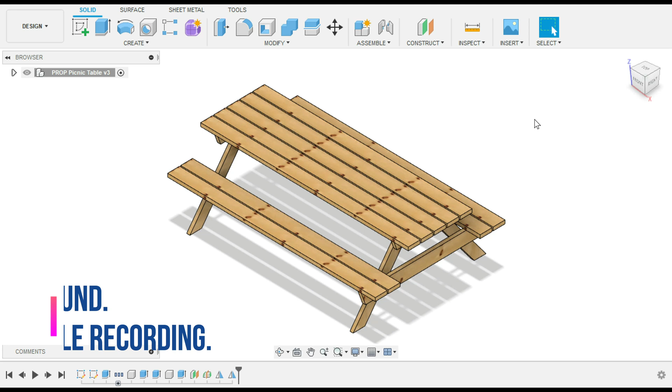Okay, so we're going to build a picnic table in Fusion 360. Let's get going.

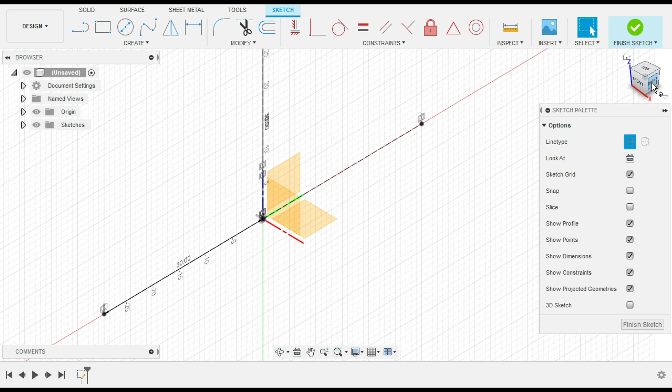The first thing I would do here is set up the bottom portion of where the ground is going to be. I would use a construction line for this, which basically gives me a point of reference for the actual ground where the picnic table would sit.

I can also use both the vertical and horizontal for mirroring purposes, which always comes in handy.

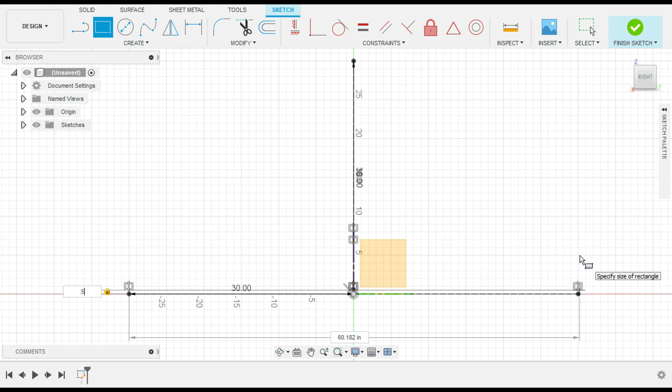Now, I did set some parameters on this particular build, but I don't remember if they came into play on this one, and this was done before the recording of the voice commentary. I did not narrate it as I went along, so just keep that in mind.

I apologize if I rattle on or try to remember what I did at a certain point. But anyway, I'm essentially designing the bottom portion of the picnic table here, and you'll see more as I go along as to what I'm doing.

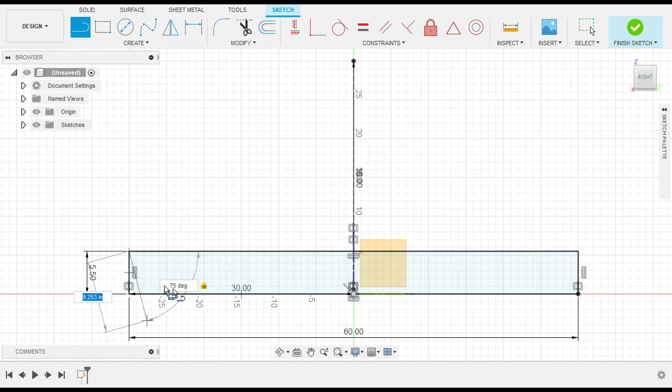A cool thing I just did there I want to talk about is you can set the degrees and they lock in place, as you can see. I'm trying to cut a little miter here on the tips of this wood, and it's letting me adjust the length while not adjusting the angle.

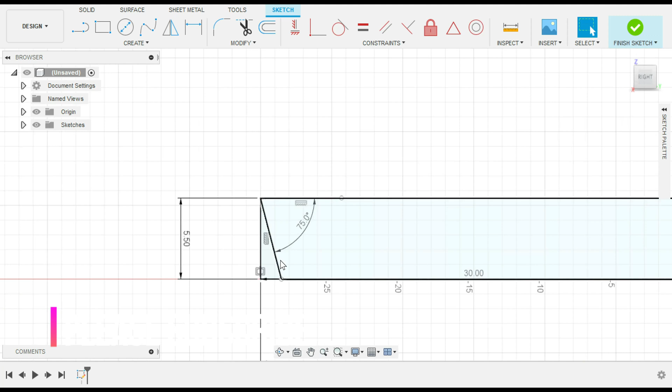Because I set the angle first, the key is to set the angle first, and then you can adjust the length that you need, and it'll maintain that locked-in constraint of the angle. Very nice feature in Fusion 360.

And I just mirrored it as you saw there, which I do all the time. It's a great time-saving tool to be able to mirror everything along.

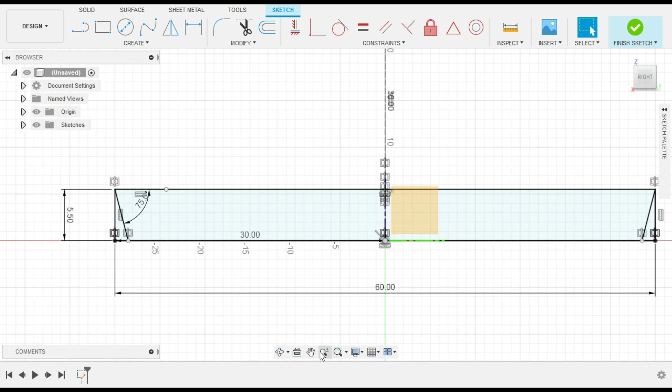Now, on this one, and a lot of the ones I do in Fusion 360 for woodworking more so than leather, I tend to do an entire sketch first and then start extruding. There's the actual parameters I set.

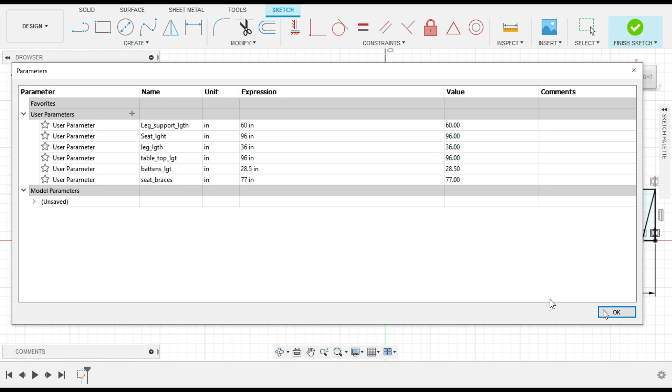But I like to extrude at the very end. I don't know, it's a preference. Some people extrude stuff as they go along. You can do it either way, but I typically do the entire sketch first, as you will see here.

The parameters I have in place are in case someone wants a picnic table on order and they want one for a family of 6 or 10 or 15 instead of just a standard picnic table. So you'll see what I mean.

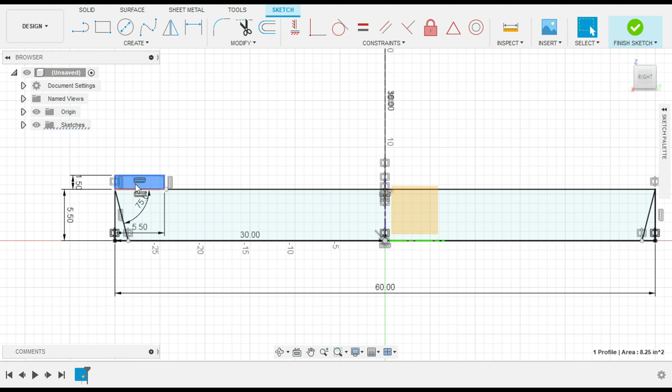The standard width is 60, as you can see at the bottom, from seat to seat, and you'll start seeing now the seats form, as a matter of fact. And I'm just copy pasting and dragging it over.

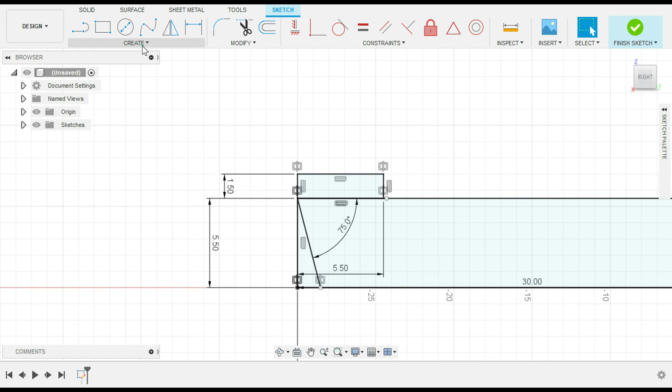It's just that simple to drag over the 2x6s, which are what these are going to be eventually, as far as for copying.

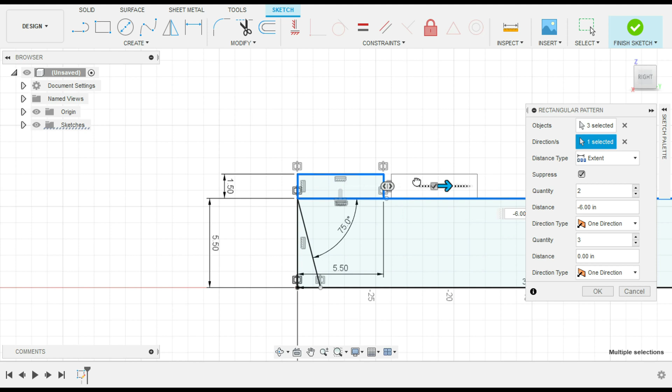You can do rectangular pattern, you can copy paste. There's different ways in Fusion 360 to get you from A to B. In this case, I'm just using rectangular pattern again, which I've used in the past, which is amazing, as you can see right there. Just a great feature to have, to be honest.

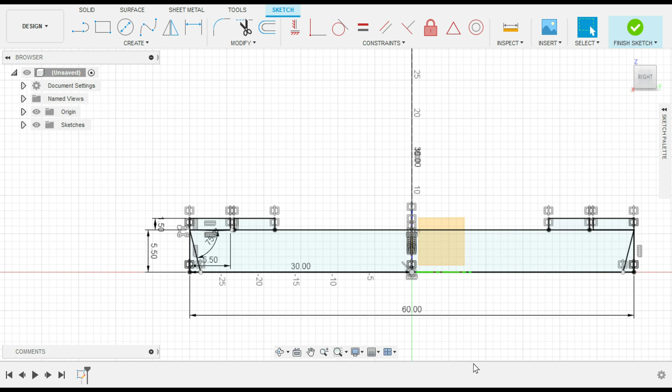So as you can see, just using more of the mirroring feature in Fusion 360 to help speed this along. Can't say enough good things about Fusion 360.

Something I'm noticing here also is that line I set for a construction line at the very beginning was actually for underneath the base support for the seats, not the actual ground level, just for clarification. You'll see that in just a minute, if you can't already tell what this part of the table is.

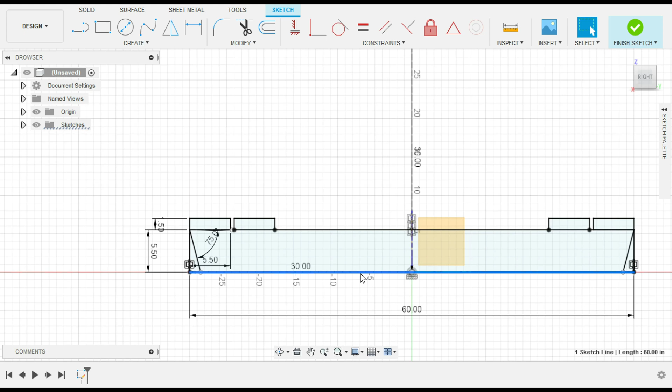What I'm doing here is setting the top of seat to top of the table measurement. And I'm using, again, a construction line just so that it's not a permanent line there that I get mixed up with anything else during the extrusion phase.

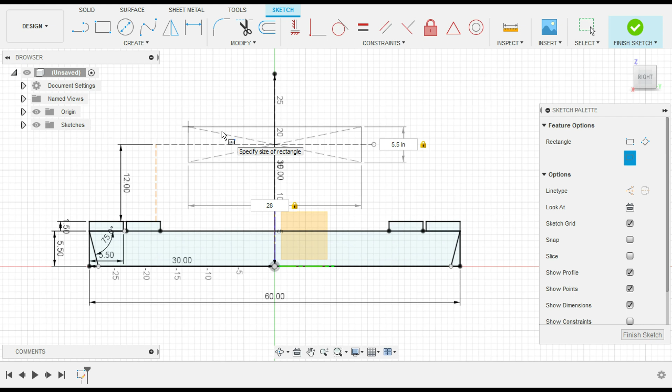Now, I'd mentioned that the construction line is at 12 inches from the seat to the top of the table, but as you can see, it's not there yet, but it will eventually be lowered down to the proper height.

It's just that this is used as a reference to let me know where I need to get it to eventually. Many ways of doing it, again, but this is just how I choose to do it most of the time.

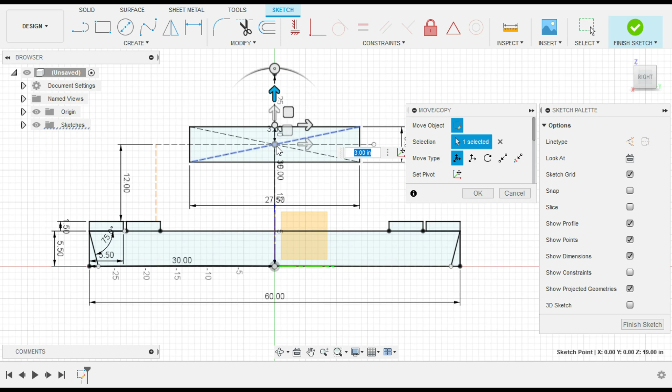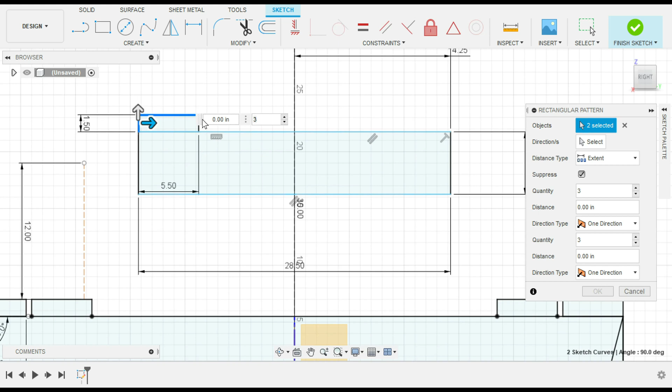So again, for adding the 2x6s to the top, you just do copy paste, or you can do, like I just did there, rectangular pattern, and just put as many as you think you're going to need.

In this case, I know how many I need, I've done this before. And you can drag them over, or you can just set exactly the spacing you want.

I didn't even, as you can see, it's still an extent. I didn't even feel the need to use the spacing feature. But anyway, looks pretty good. Right on, can't beat that.

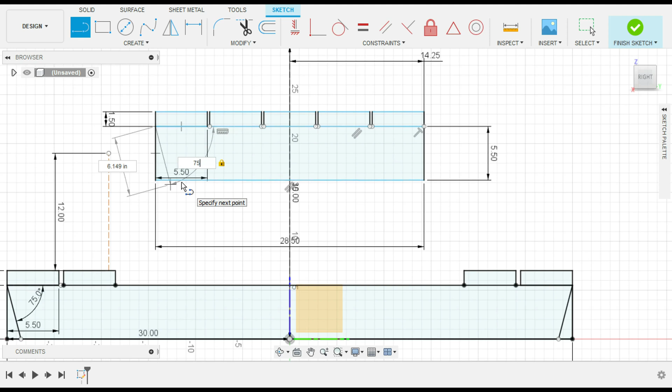And again, you'll see here I tabbed over to the radius to set that first. And once you set that, you can drag to the length that you need for your eventual miters, which you'll see me cut out with the little scissors up there once I get to that part.

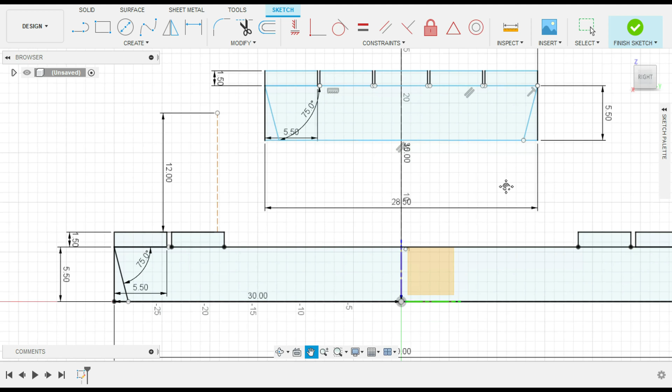Okay, the fun part now is going around and cutting everything out. As you can see, you just grab the scissors and start cutting all of these lines that you don't need, which will help you achieve the miter, as you see there. And I do it for the top as well.

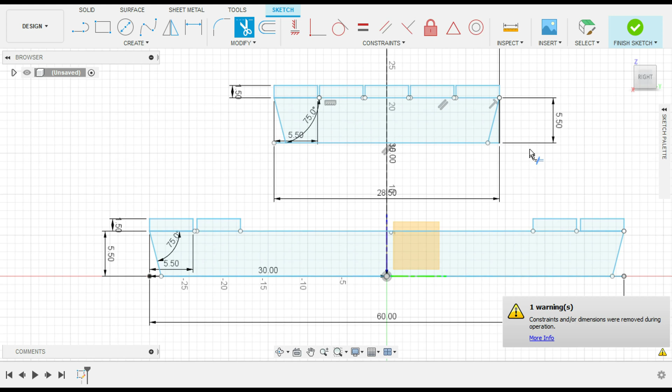And if you didn't see it earlier, I do have my 12 inches now from top of seat to top of tabletop, which is what you want.

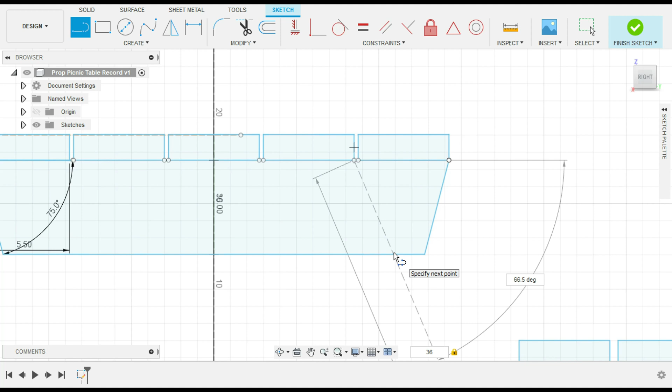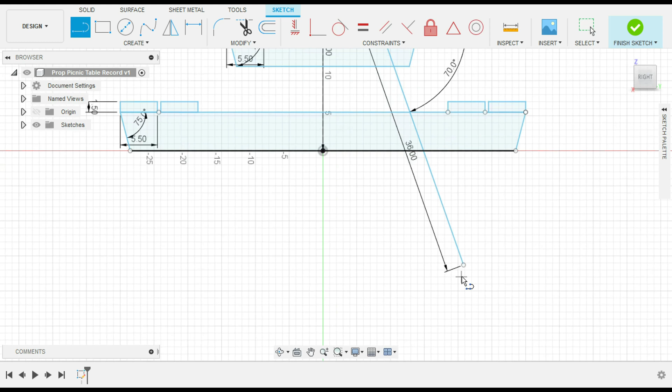Okay, so now we're going to get into the legs. I know the radius that I want, as you can see, I set that first, which is awesome. And I know my length is approximately 36 inches on this board.

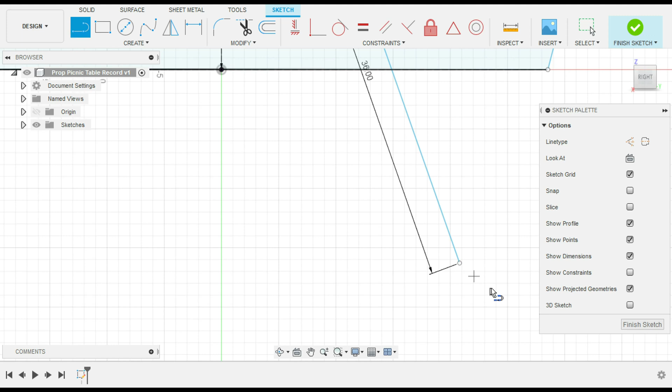I'm just checking here the miters that I want to do to get this flat, and setting those now. I'm also seeing that I used construction lines. Yeah, I caught myself, that wasn't right. I do that a lot. Fusion 360 picks up where you left off, so if you're in construction lines, you're going to be in construction lines until you click that off. You got to remember to go back and do that, which is easy to catch because you'll see right away that you're still drawing construction lines.

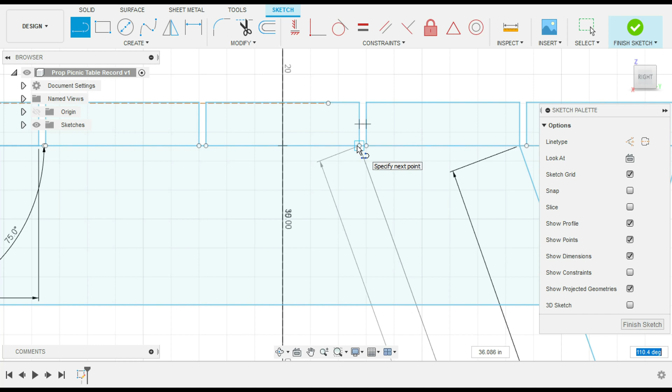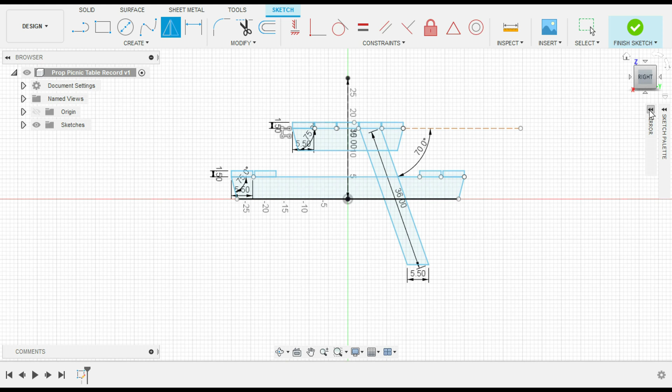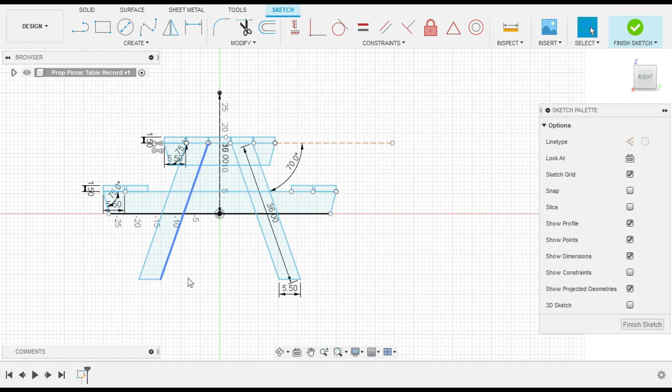Okay, so got the first leg done there on the right, and what do you know, we're going to mirror this again, which is the fastest way to do it. So I'm going through here and clicking on the individual lines that I want to mirror, and then I'll click that center line, construction line there, right there as the mirror, and there you have it. Just that easy. Really starting to look like a picnic table.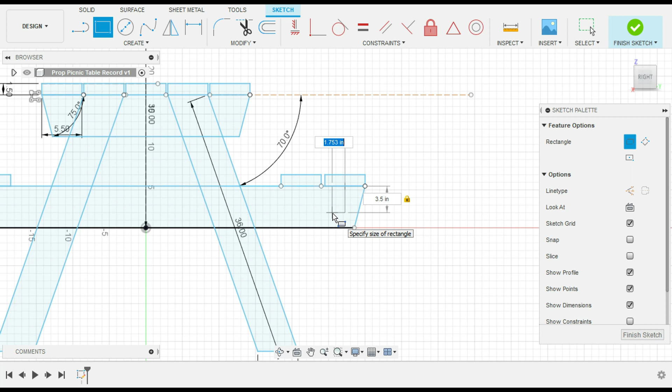So like I said before, I like to use this as a sketch first before I extrude. So now you're seeing that I'm going a step further and putting the seat supports in underneath where they're going to go as well. Again, you can do this later, but I just do it up front a lot of times as far as on the sketch, and then extrude everything at once.

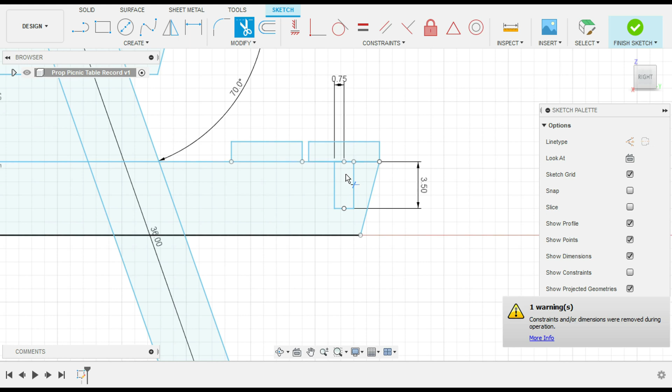Okay, another reason I wait to do the extrusion is because it's another one of the fun parts, like using the scissors. So now we are just about to do that. We're going to start the extrusion process. And all you do is hit E for extrusion on a Windows PC.

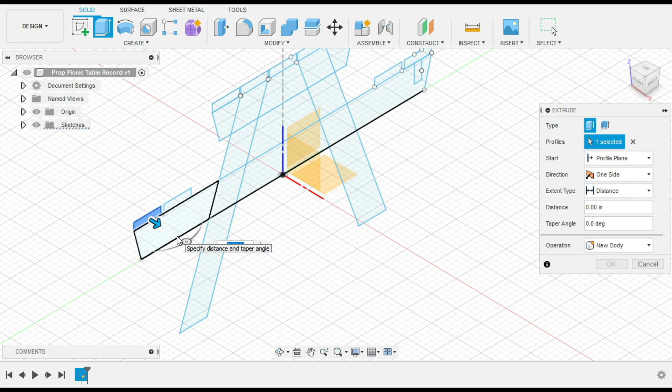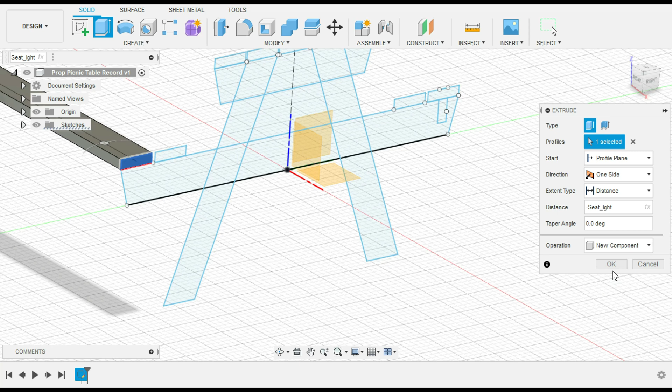And in this case, let me see, yeah, the origin. So I am on the side of the plane where I need to go negative to have a physical object. If I were to leave it where it is now and do a positive number, it's going to go the wrong way of the table that I want it to go anyway. So in that case, you do a negative number to the length you want, and there you have it. It just shoots it out the opposite way of the plane, which you see there on the Z-axis.

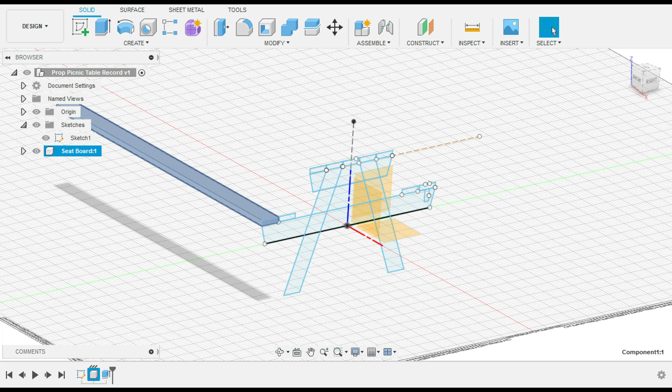And again, Fusion 360 takes off when you extrude. It removes the sketch from view, which is just, I still to this day don't know why it does that. I don't know what you achieve from that, but that's how it is.

Okay, and I apologize if you hear any noises in the background. That's my German Shepherd, but hopefully you don't hear that if anyone's listening to this video.

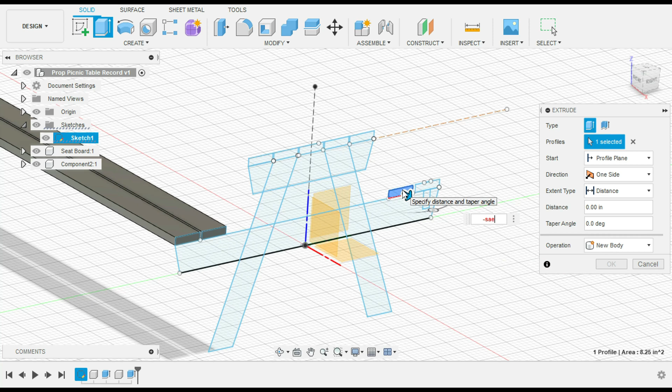So we're going to continue on here and do the other two seats and the support. We'll do the legs and everything else. And you're about to see a mistake that I made up here in a minute, which I left in for educational purposes.

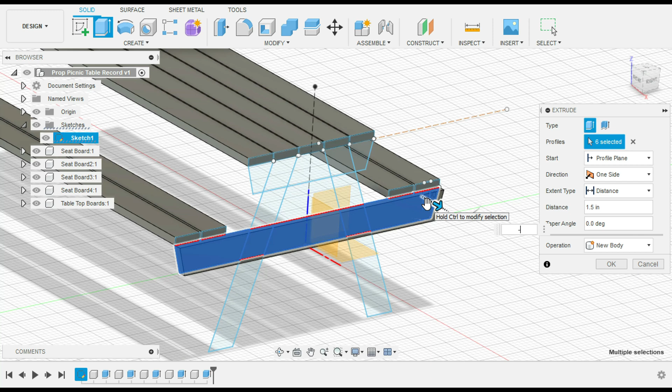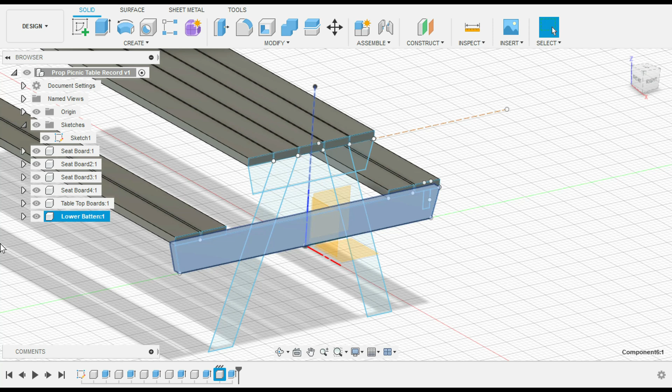Don't feel like it's a big deal, doesn't look like it's a big deal, unless you've already seen what I've done here. What I've done is I didn't allow for how much I need to be off of that plane. Keep in mind, the plane that I'm on, that I'm extruding away from in the negative, is the starting point of the table. So in this case, I need to do some math to get the proper distance away from the edge. Otherwise, you're going to have the most ridiculous looking picnic table ever, because the supports and the legs will be on the outside of the table, which is not what you want and quite ridiculous.

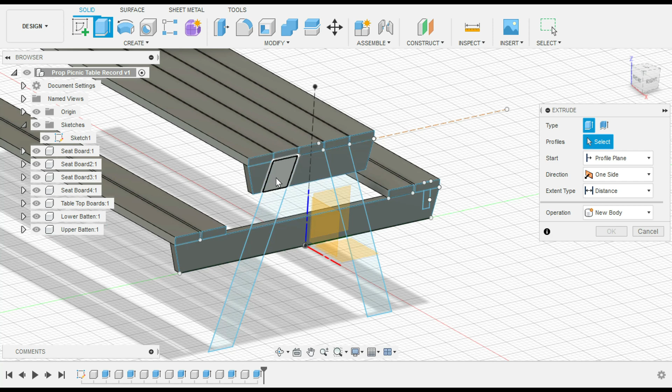So I made a mistake here, caught it, left it in, and then I'll get to the next part where I fix it and you can see how I did it.

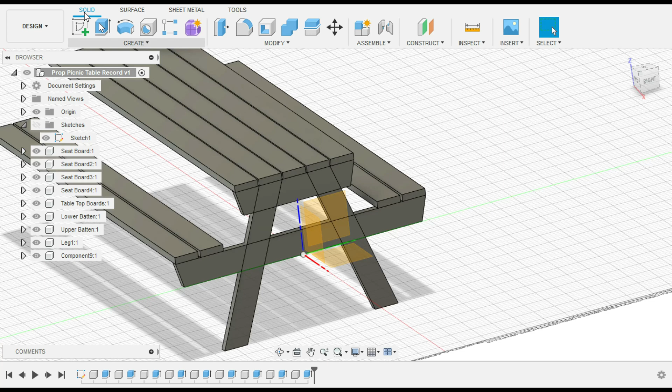Okay, so looks like I went and got some more coffee and decided to redo this the right way. And as you can tell, I need to do an offset. You'll see here it's going to be an offset.

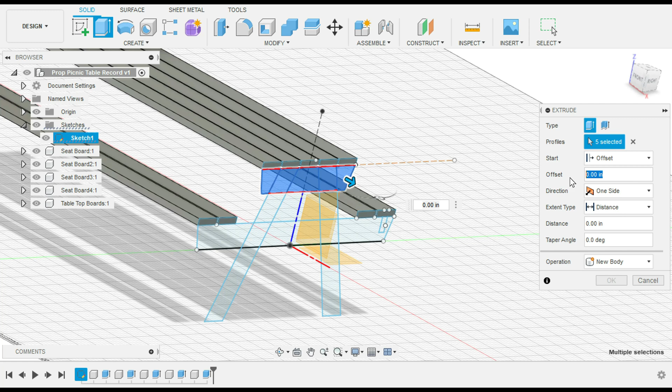So all you do is you drop down and it gives you another item to put in for offset. So now I know I want the face of this to be 8 inches away from the plane, or the edge in this case, and then I can do the math. So I did 8 inches on an offset, and then I did the 1.5 inches thickness of the board, and look what it did. It moved it perfectly into where I need.

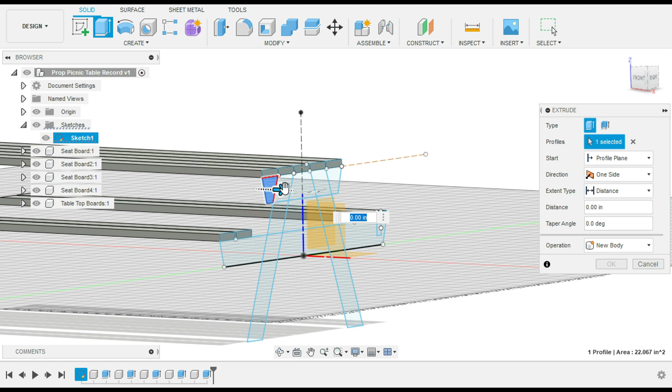So you're going to have to do math here, because some of these, like the legs, need to be on one side of the support, vice versa. So you get into a little bit of math here, and maybe even some deleting and revising to get it where you want. And it looks like I may have actually wanted to do it again here as well to bring it in even further.

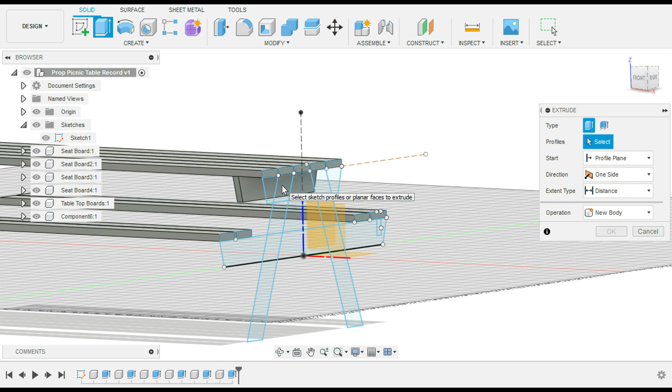So again, here on the legs, you're going to have to do a little bit extra math as an example, because you're going to want to not only bring this in 8 inches, you're going to want to be on the other side of the base. So you're going to have to extend the thickness of the actual 2x6 for the leg, which is 1.5 inches.

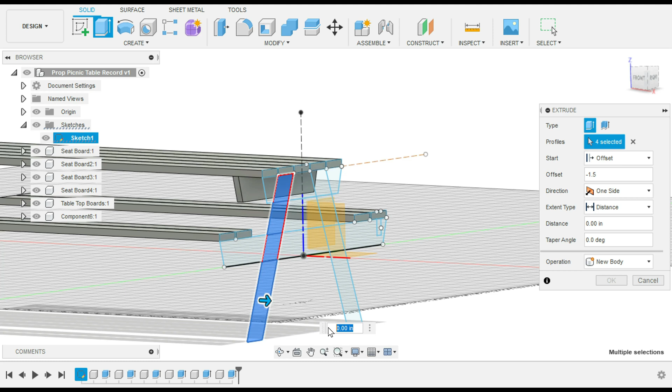So the offset here, I don't think I'm doing that right, it looks like, but yeah, so I didn't do that right, you can see. And again, I recorded the Fusion 360 before the voiceover. Gotta remember how I did it. There we go. So that looks a lot better.

It's on the other side of the base support, which is going to have to take into consideration the 8 and the 1.5 inch thickness of the support. So you have the 9.5 inches to the face of that leg and where it needs to start before you can extrude the 1.5 inch thickness of the leg. And you would do that on both sides, which is you can mirror that, or you can simply just go through and do each one individually.

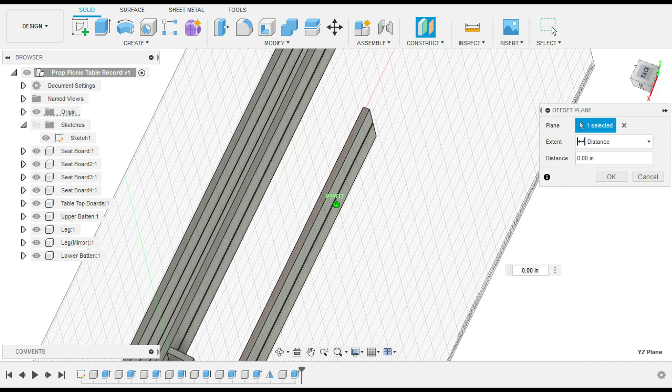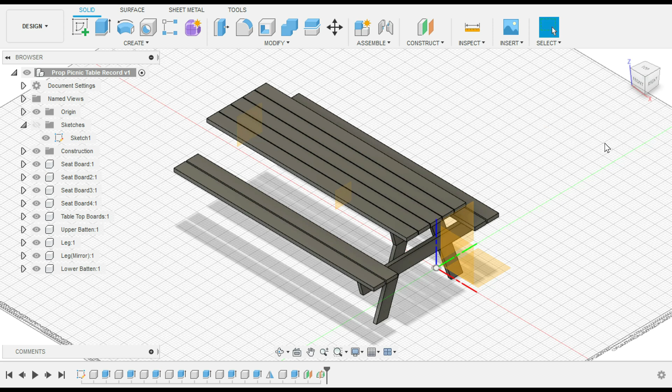Okay, it really looks like a picnic table now, but it would fall over if I left it like this. So you can see that I added the construction planes, which are great. One offset and a midplane will allow me to mirror all of these objects at one time with one click, and there you have it, just like magic.

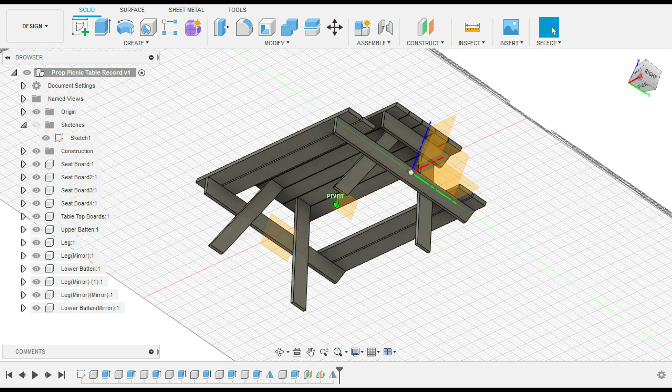And again, these are all separate components on the left, as you can see, that I can print out on a later date for a PDF printout, for blueprints, for material list for someone. It'll literally spit out exactly what you need to build this table. You could go a step further too. You could add in the bolts, which I've done for customers before, or whatever, however far you want to go.

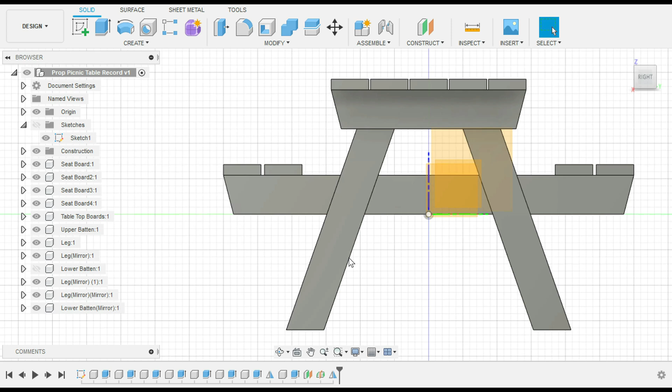And on this particular build, the Fusion 360 build, I don't even think I went all the way with all the supports. I know I do the ones under the seats, but I don't think that I do the braces underneath from base to base, which you're going to need on a picnic table.

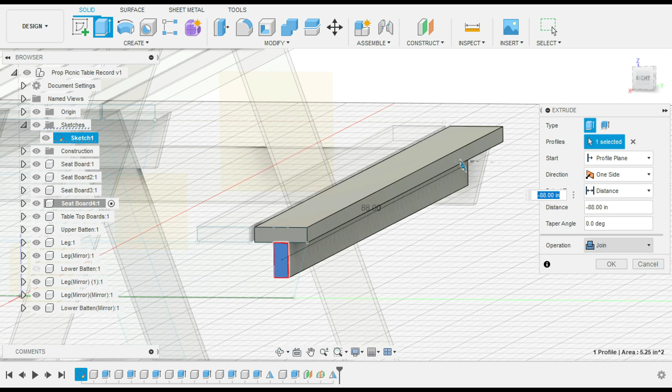But even this was a little tricky too. You've really got to do the math, because you got to think you're on the surface of the base 8 inches away, and you need to go the span to the next one. So you really have to be on top of your game, or do a lot of back and forth on this. But once you get one, you can easily copy them over and mirror, which is great.

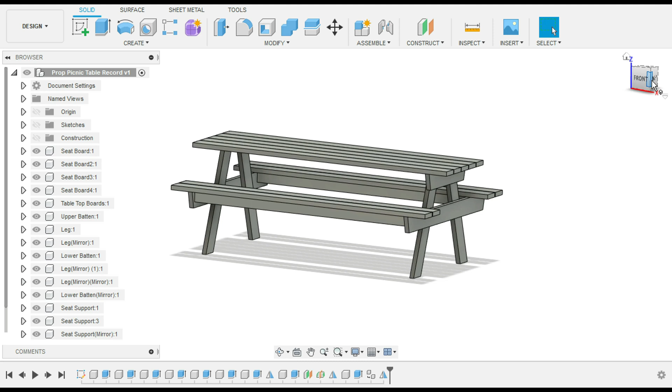And if I'm not mistaken, this was probably the second or third time I did that particular brace, because it was getting a little tricky. And you want to do new component, not cut, as you saw. But there you have it. It looks pretty nice. I mean, that would be a decent size picnic table.

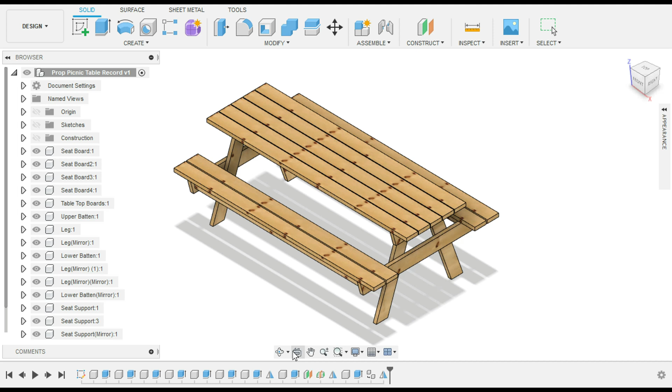And you can go a step further, which I think I did, and add some color. In this case, pine. You can drag and drop it to the entire project like I did there, which is great too. That way you can just do it all at once if it's something that's going to be all the same material. And not only does that give you the color, it gives you all of the material characteristics on the back end too, for the volume and everything, so it's great to do that.